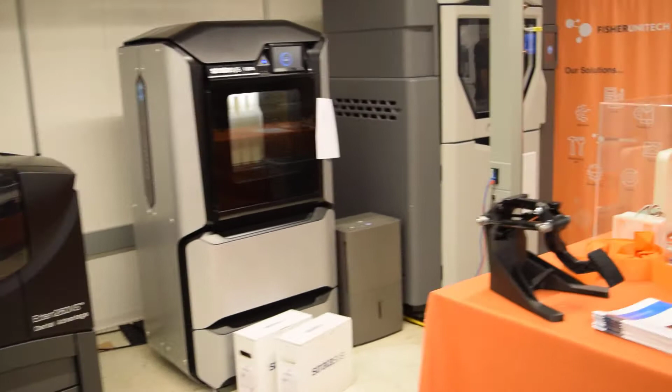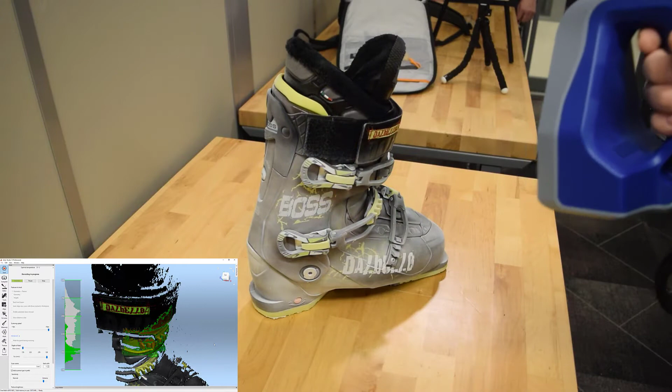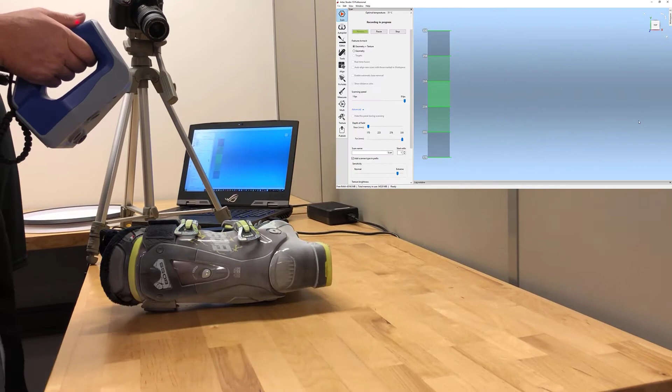Using the handheld Artec Space Spider, Derek was able to capture scan data for my boots, skis, and bindings, detailing all of the critical information I would need to recreate certain components inside of SOLIDWORKS. After working his magic lining up multiple meshes, I was able to get a fully detailed recreation of my boot in STL format to import in.

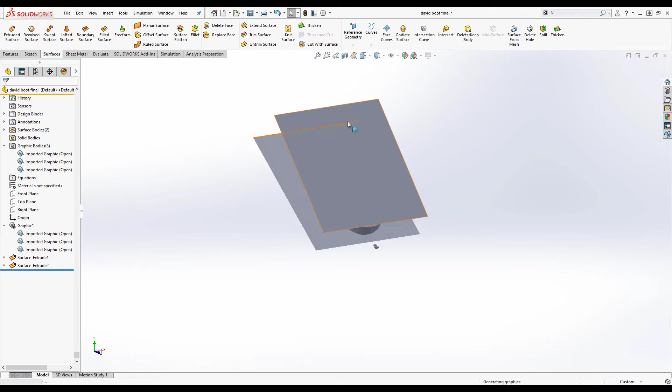Once in SOLIDWORKS, I went to work on the components of the boots I had the most concern with wearing out, my buckles. Using surfacing tools to cut down the size of the mesh, I went about recreating a full model of the buckle itself.

Now for another important aspect. If I'm going through all this to print a replacement part, I want to verify that it can withstand the rigors of the mountain I'm actually planning to use it on. Running some simulation studies for stress, I get a good idea of what material is going to work best and which ones may not be worth my time.

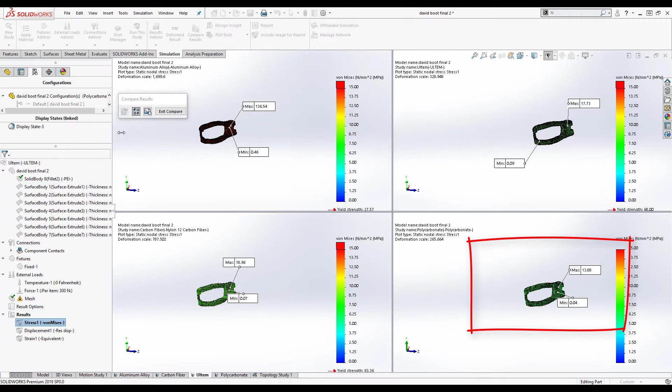Since I'm printing, one consideration I want to take into account is how much material I'm using to get my desired results. I can run a topology study to see what type of material reduction I can get and reduce the cost of the overall part. With my final model ready, I can kick it back over to Derek to send to one of our Stratasys 3D printers to get my final replacement.

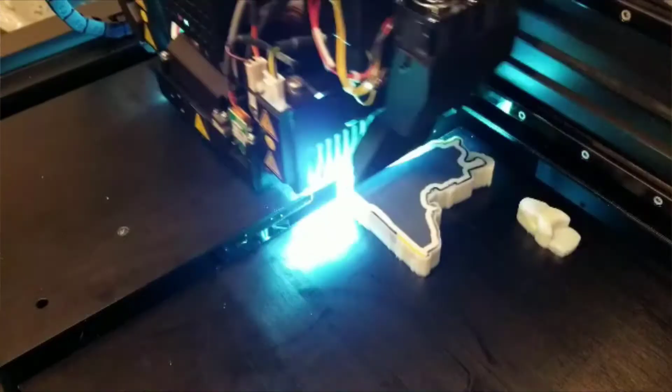While I've been working, Derek sent over our boot scan to the 3D printer to give us a miniature replica, including textures and color. The 3D printing team at Fisher Unitech deals with challenges like this on a daily basis, producing incredible replicas and production style parts.

The ability to create anything you want is now more accessible than ever before. With my extra equipment, I won't be letting anything on the slope slow me down.